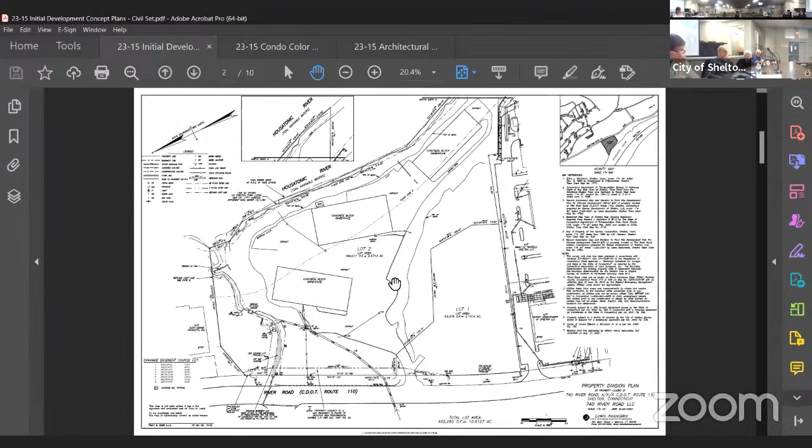Commissioner Amato had a question: what is that other property it's going to, where Fatty Patty is and Parker's? That's Parker's, where Dominic is pointing now, and the retail portion of the site. When we get to the second public hearing, I'll explain more about what's going on over there. Parker's is there, and Orthopedic Specialty Group is in the building back towards the rear, towards the river. So they're getting the almost 2 acres. That's correct, yeah. Okay, thank you.

So going to the site plan, we're proposing 51 townhouse style dwellings. Each dwelling has a 2-car garage. We are also providing a minimum of 18 feet out to the main driveway for the development, which provides 2 visitor spaces on the driveway apron. And we're also providing 20 additional visitor spaces in 3 separate areas on the site.

There's a confusing heavy dark line here through the middle of the driveway, that's a computer gremlin, you can just ignore that, that shouldn't be there. So we have a total of 224 spaces, or a total of 4.4 spaces per dwelling unit.

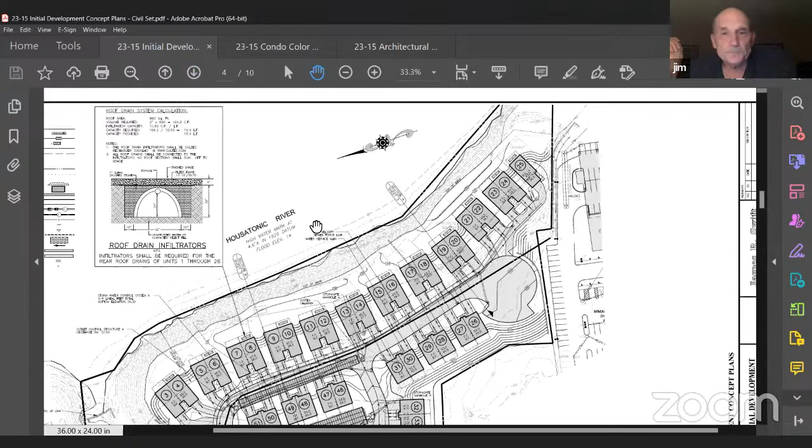So we have a site that has 2 pipe discharges into a water course on the northern section of the site. You can see it's a water course, but only where those 2 pipes discharge into it, and it's a rather steep valley which we're avoiding, staying away from that. Otherwise the site is pretty well graded, it's got a moderate slope from front to back, but nothing too much to handle. It's easily developed, so there's not much grading. The driveway has about a 10% grade coming into the site, but it flattens out almost immediately.

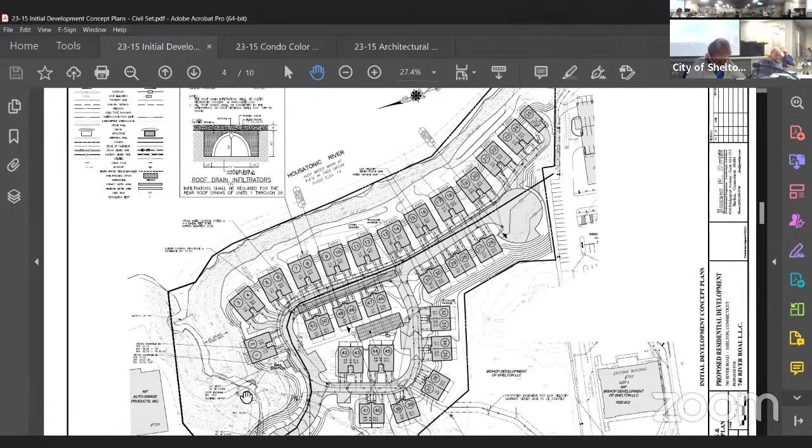Question: any concerns about the pipe on the left by units 1 and 2? I'll discuss that, it gets into part of the discharges. We have underground water retention and detention systems, a couple of those on the site. They're rather detailed in design because, as Dominic mentioned, we do have the inland wetlands approval already, and all those discharges fall to that pipe at units 1 and 2. That discharge is permitted in its current form by the Inland Wetlands Commission, and in point of fact that discharge will also have a drainage easement extending back up to PDD 72, which I'll get into when we start talking about that project and that hearing.

We are using a low pressure system because we're fairly low down by the river. Each individual unit has its own individual pump, and they all pump up to a low pressure system that extends out the southwest corner of the site over into PDD 22, going through the open property there. That low pressure system has been reviewed and approved by the Shelton WPCA. And again, for the record, all other utilities - water, electric, communications - are all available to the site as it exists right now.

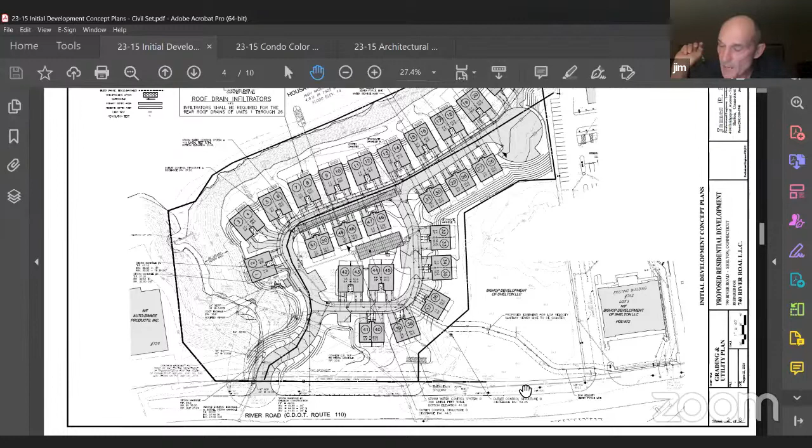If you go to the next drawing, Don. So this is an interesting drawing that was specifically requested by the Inland Wetlands Commission.

The existing warehouses were built fairly close to the river, and it's hard to know whether this embankment down to the river was a result of those buildings or was a natural form of the river eroding. But in any case, the question was raised: that's a fairly steep slope.

A 2-on-1 slope is more of a normal slope. Shouldn't we design these duplexes so we have long-term reliability that they won't be affected by the river? So that's what we did. We did these sections - you can see that the 2-on-1 slopes are projected into the area. We don't expect it to ever come to that, but it certainly is a possibility. So we did that for the Wetlands Commission.

I'll also address the FEMA elevations. The FEMA 100-year return storm is at elevation 14, which you can see is fairly low. And we're up at elevations 30, 32 for our basement. So there's no question of any effect from 100-year storm events, even 1,000-year major storm events. Nothing is going to reach up that high.

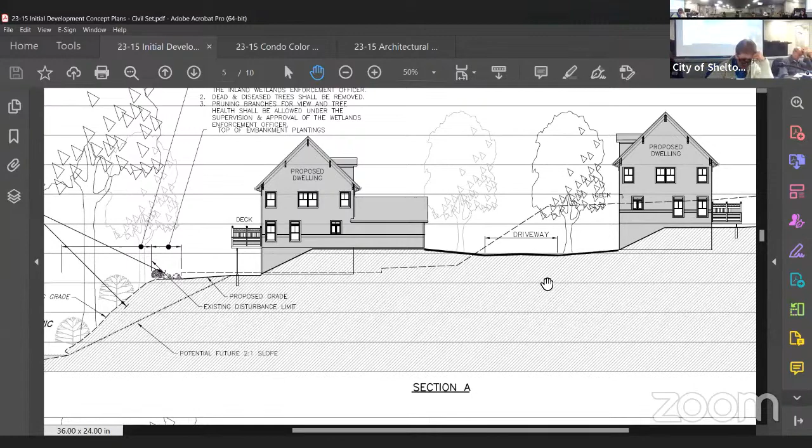So what's the difference on the right side? You have two buildings, two trees, and... There's two different elevations on this sheet. One section is taken through one portion of the site, and another section is taken through a different portion of the site. That's what I was asking.

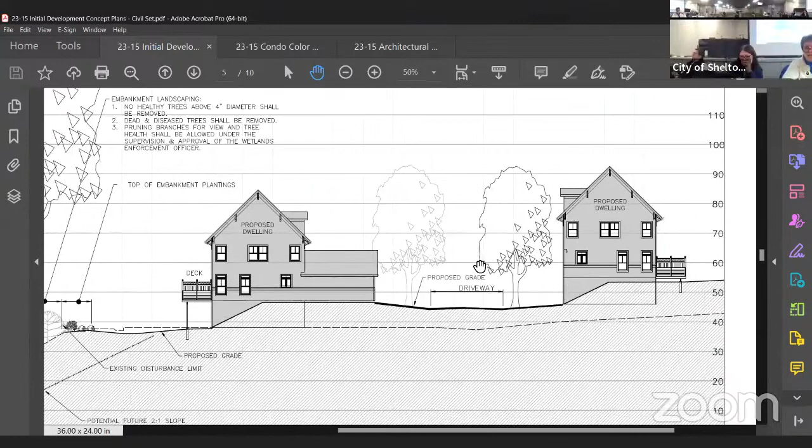These are in two different areas along the site, so you can see on the section - I'm sorry, I keep saying elevation - on this section you can see that the existing grade is well below a lot of the proposed construction. So what we're doing is we're balancing the site for cut and fills, where we don't have any intention of trucking any major earthwork volumes on or off of the site. So those two different dwellings you're looking at are the dwellings closest to the river. Then you see the driveway, and then the dwellings on the other side of the main driveway.

But I also want to make a couple of points on the section at the river itself, and I want to be very clear: we have no intention of grading out that potential future 2-on-1 slope. That is purely a precautionary indication.

Wetlands would like us to maintain all the vegetation on the existing embankment to the river, with the exception - and I've walked this embankment extensively with John Cook, we actually did it in the winter, walking on the river ice, which got pretty interesting.

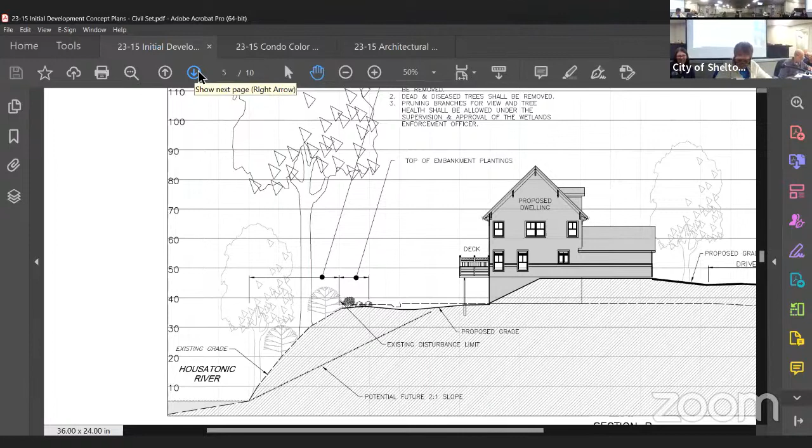I'm sorry? You're referencing a lot of information that's on sheet 5. Do you want to move forward to that sheet? Well, I just want to make one last point while you're looking at this particular sheet.

You're going to notice a little depression between that proposed landscaping and top of embankment plantings by the building. It's a low area, intentionally designed so we don't have any runoff, no fertilizers for lawns or anything like that discharging directly to the river. Now we can go to the next sheet.

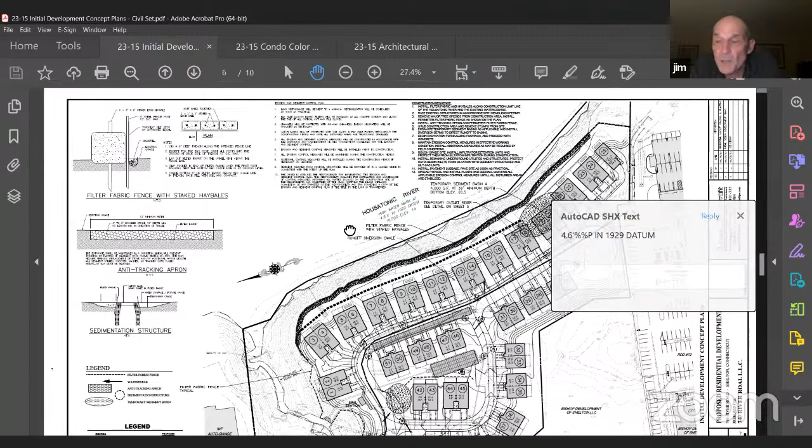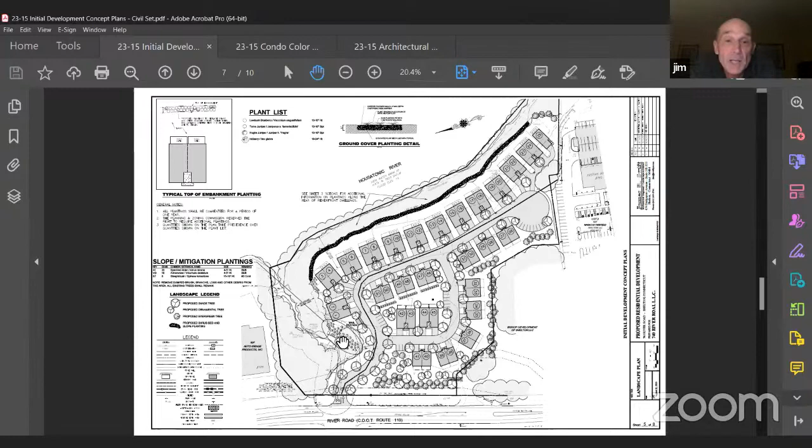We've got a little sloping, and some areas down there with kind of junk species, some dead trees, some logs, things like that. We're going to clean that up and make it presentable and more in line with what Inland Wetlands likes to see for wetlands and wildlife enhancement.

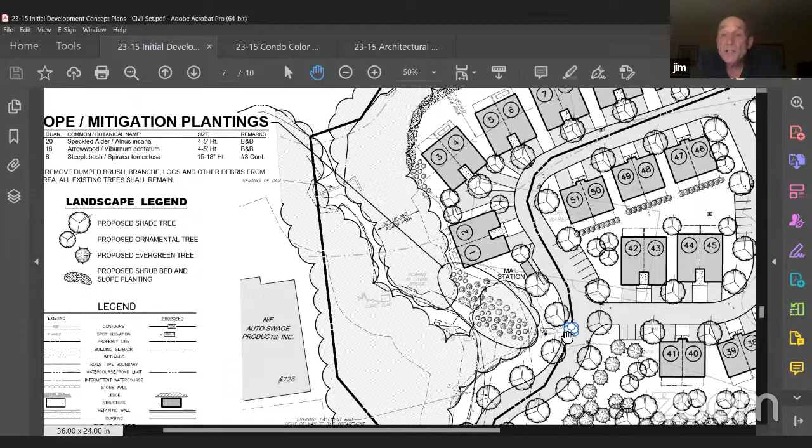The remainder of the landscape plan is conceptual, that's the kind of thing we'll be looking at in more detail. I'm sure Tony Panico will have comments about that, as far as how we buffer plantings, what standard planting details we'll have along all the units, et cetera.

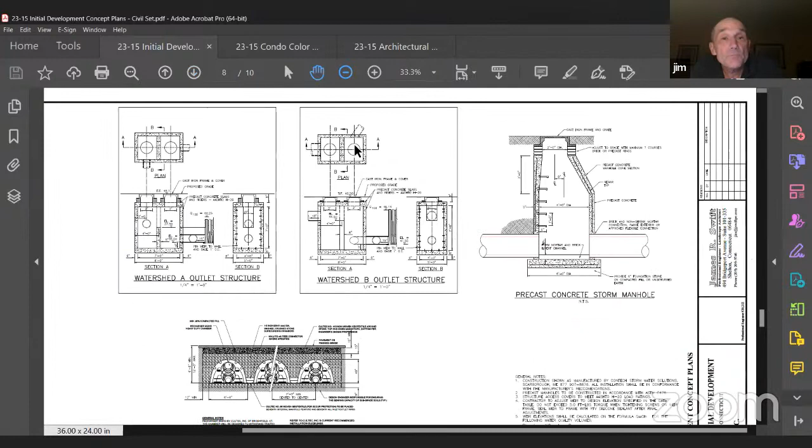Next plan. Again, this is a stormwater detail plan that has a lot more detail than this commission is used to seeing on an initial development plan. But it was done because it was required by the Inland Wetlands Commission, to be sure that all our discharges, all our runoff rates, all our water quality issues were all addressed.

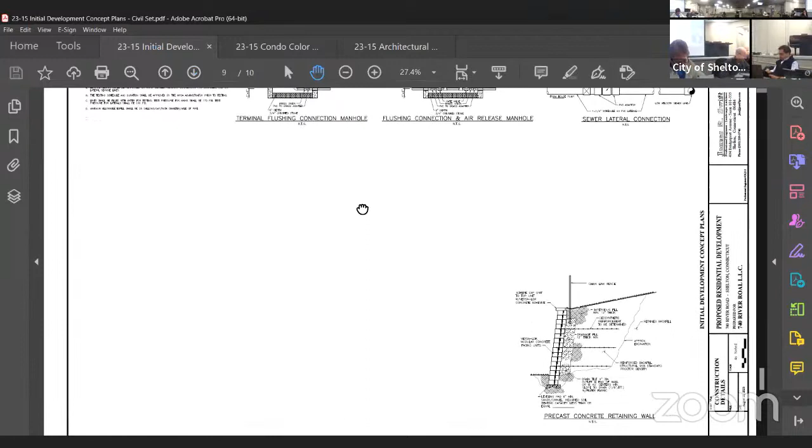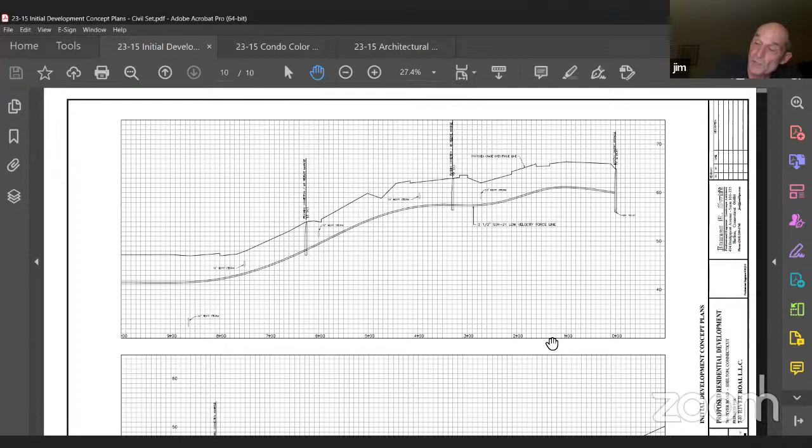So again, we have WPCA approval for this line. And that, without any questions, concludes the site presentation.

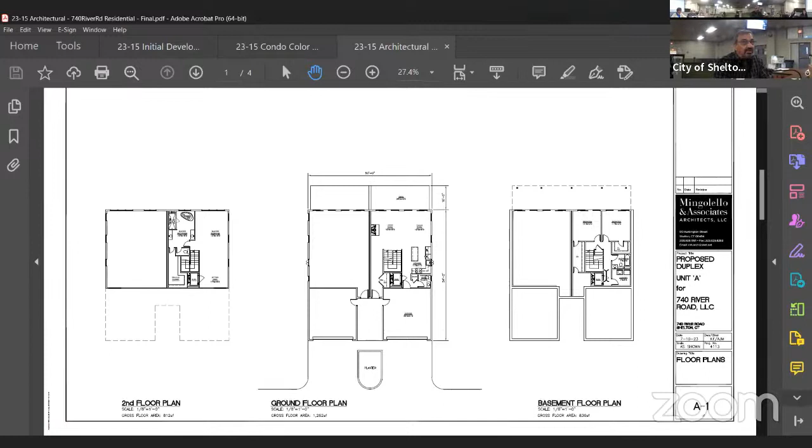And then the ground floor plan, the next level up, this is where we have the garage and the entrance. So this is right at grade, right at the street level. You walk in a little foyer and a coat closet there, and then we have a living room and dining area that is open to a deck and to lots of glass facing the water. And then from the garage, we've got a little half bath, coat closet, and a kitchen. Basically the whole first floor is open.

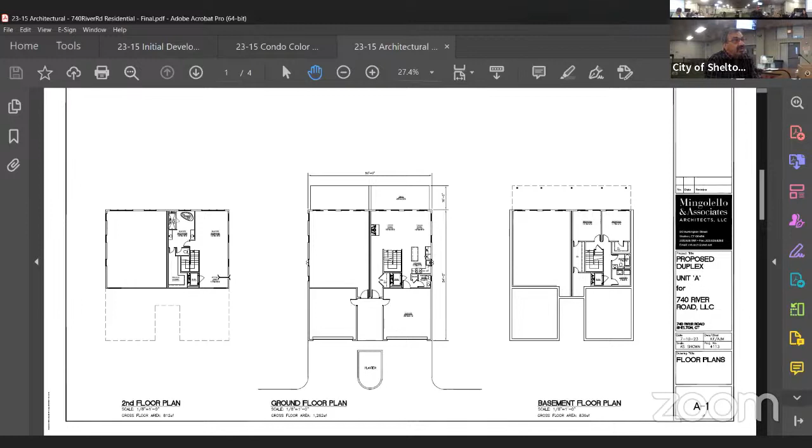And then you take the next level up, you can take the elevator or the stair, and it's a master bedroom suite, master bathtub, right on looking over the water, shower, toilet, walk-in closet.

Okay, so that's the floor plan. Can I ask you, on the basement floor plan, there's no walkout? On the basement? Oh yeah, there is, they're sliding glass doors, and you'll see them in the elevation.

On the right side, it's this big open room on the left. Pan over to the lowest level. There you go, see those 2 bedrooms? Those are on grade, and there's sliding glass doors facing the water. You walk out on grade from the bedrooms. Correct, yep. All right Dom, you want to go to the next sheet?

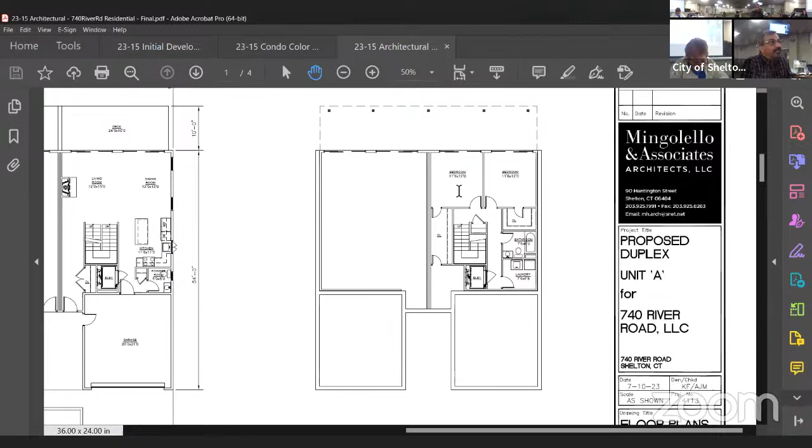We'll look at the elevations and the building section. Pan over to the right, front elevation, a little bit further over. Okay, so the front. That's good, thank you. That's the front of the building, what we call the street elevation.

You get the garage and recessed back of the entrance doors. It's basically vertical siding, and I'll show you a color. We colored up both units A and B, so you can look at the color and the treatment, roofing, and so on. Very traditional looking, dormers up into the attic area, vertical siding, thin stone veneer on the lower level.

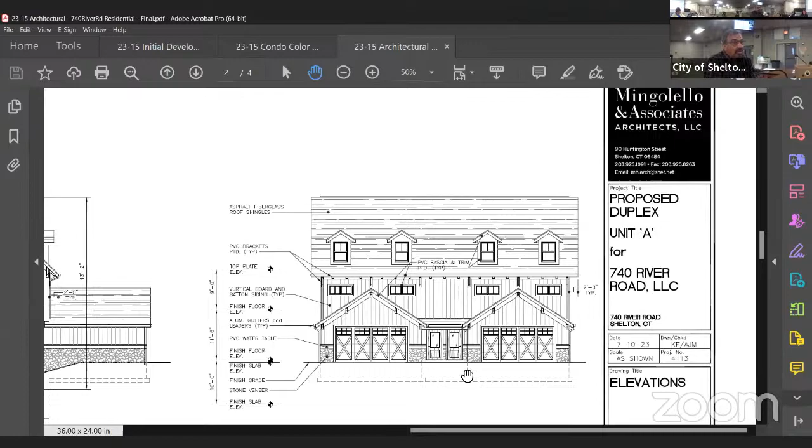I'm going to pan over to the right and look at this, the side elevation, left and right side elevation. As you can see, the grade slopes down towards the water, and you have the deck up above, and that's where those lower bedrooms exit at that grade. Okay, that's the side elevation.

And then the rear elevation, water elevation as we call it, those are your sliding glass doors from the lower level. Then we have the dining and living room up above, it's all glass. And then the master bedroom suite, lots of glass, and that's the bathroom. I'm sorry, forgot what space that is. But anyway, that's the rear elevation of the building.

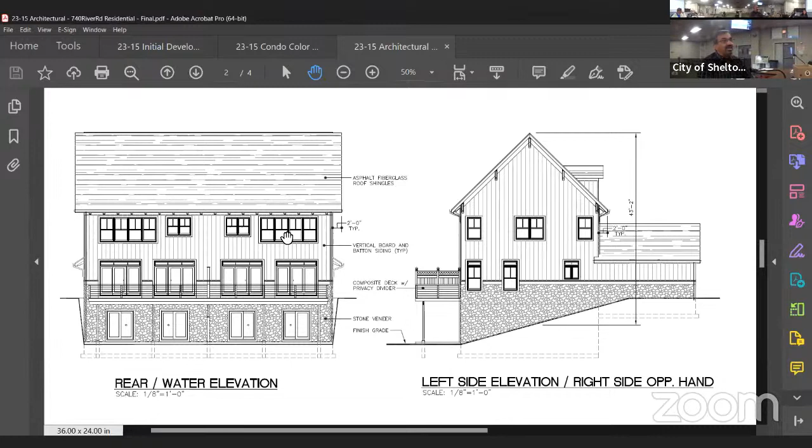Okay, if we can go to the next drawing, which are units B. Now, units B, as you saw units A are along the water. Units B are inland, and we work against the grade which slopes from the street towards the back of the building.

So the right side, we have the basement floor plan. You pull into the garage, and at that level there's an elevator and a stair to go to the main level and some basement space. If you're outside parking in front of the garage doors, you can walk up. There's a set of stairs, a little planter in the front, a set of stairs that go up about halfway to a little portico, a little entry porch, and that's where you'll enter.

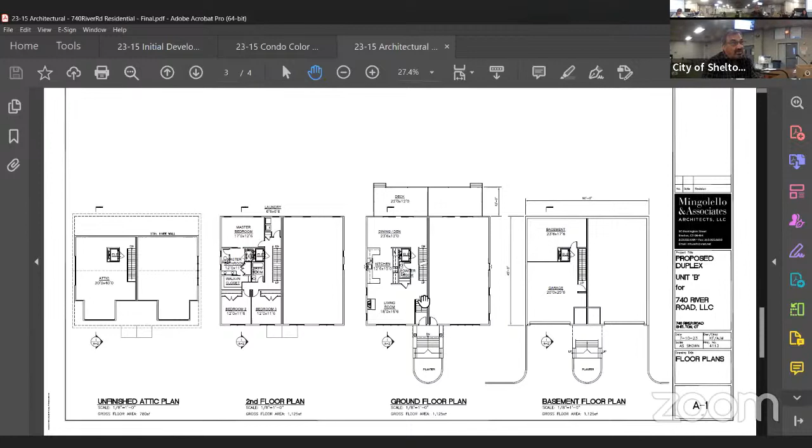So we go to the ground floor, the next plan to the left, and you can see you come up that portico, up a few steps. Then you walk into the house, and then you walk up another half a flight. So you're going 2 half flights to get up to the living space. So it's a living room right there on the left, and then the kitchen is between, a walk-through kitchen between the dining or den area and the deck. So that's the living space.

There's a powder room, and as you come up from the basement, you want to take the elevator, you get off at that stop, that level. And then the level above is the second floor. We have 3 bedrooms. As you come and get off the elevator, you take the stair up, you got the master suite. The master bedroom's on the back side, master bathroom, walk-in closet, shower, closets, and then the elevator's there, a bathroom, another bathroom in that space that will service bedroom number 2 and 3.

And then the level above that is the attic. You can use that as an office or a guest suite, whatever we wanted to use it for. There's a dormer out front, you'll see that in the elevations. And windows on the back, so it's well lit, lots of glass. And a little knee wall on the back side.

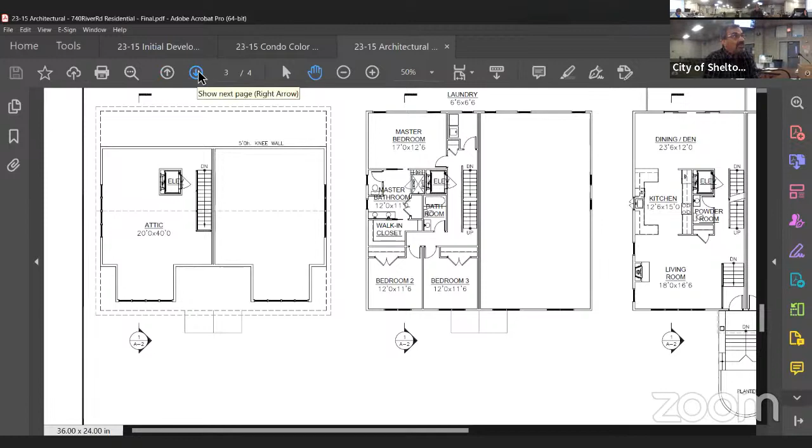Dom, can you go to the next sheet, which is the elevations and building section? So this is the building section. As you can see, we're working, you come in at the garage level, then you get a basement, and the level above we're working into the grade, and you see it on the elevations. The living space, kitchen, den, bedrooms on the next level, and then some attic space above that could be used as an office.

We go to the front elevation, right side. There you go. Okay, so this is the street elevation. Garage under, portico coming up halfway.

The big windows is the living room. Two windows above for the two smaller bedrooms, and then that shed dormer up on top is in the attic space.

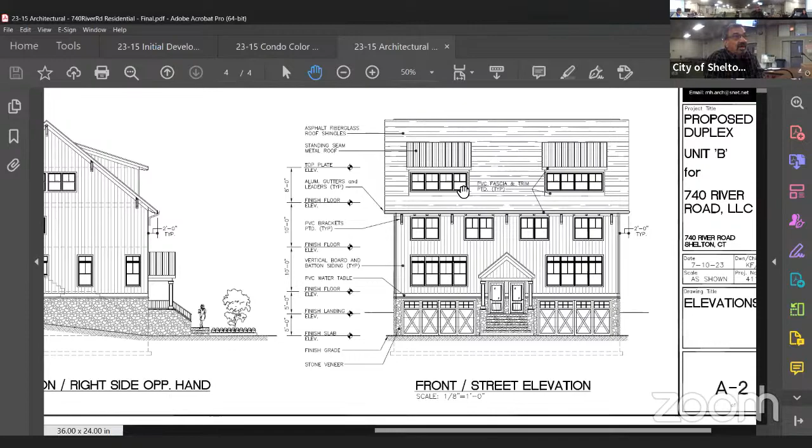It's the same siding materials we're thinking on both the interior and exterior buildings, vertical siding and board and batten style. We're thinking black frame windows and thin stone veneer for a base, which we'll see on the colored elevations.

This left side elevation, right side are opposite. You can see as the grade slopes from the street, it slopes down towards the back where the deck is. It's probably 4 feet above grade in the back as we work the buildings into the grade.

So that's the side elevation, and then the rear elevation to the left is the sliding glass doors. There's 12 feet of glass there for the dining space. That's the dining room and a little den in the corner, and then the bedrooms above, with the master bedroom above that.

Do you have a divider here between the left and right side on the patio, on the deck? Oh yeah, absolutely, for privacy. That'll definitely happen. You can see it here on the rear elevation.

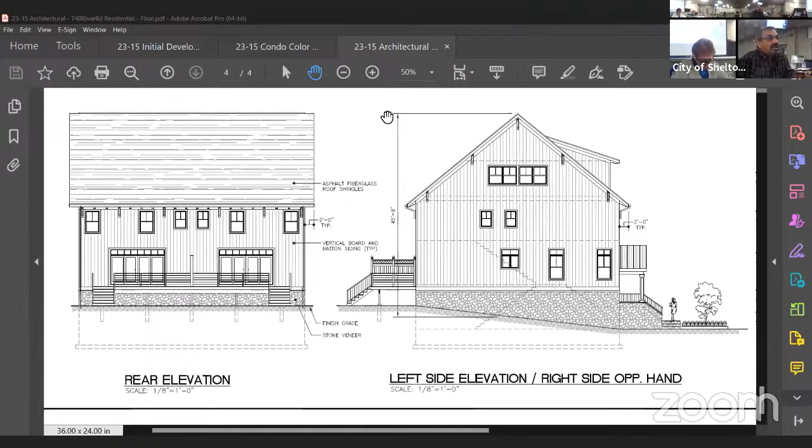Don, can you bring up the colored elevation? These are the two colored elevations we did, a little magic marker rendering. This is the front, unit A.

Unit A here is the one adjacent to the water, with the garage and thin stone veneer down below, vertical board and batten siding. We really like the look of black frame windows with board and batten -- it's really nice, a great color and use combination for this development. So that's unit A, facing and adjacent to the water.

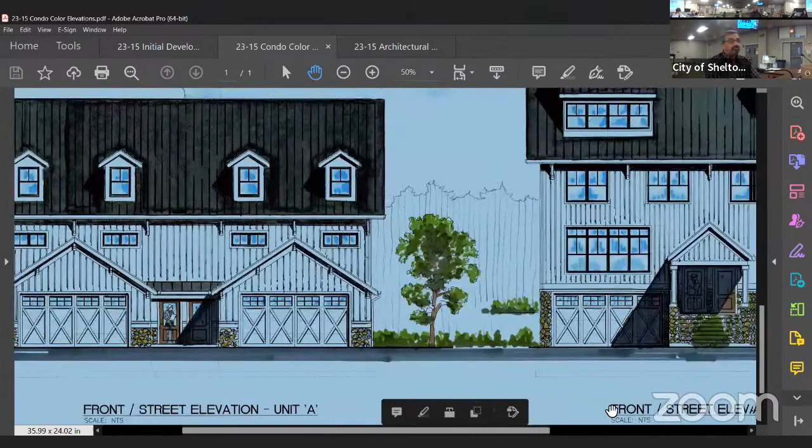And the one to the right is unit B -- same thing, same use, same materials. This is basically the 3-story unit B, constructed into the hill or into the grade, as the grade slopes up away from us.

Any questions about the materials, the colors, the architecture? For units B, are those the ones in the inner circle? Yes, that's correct. So you have 25 that are on the water, and the balance, the rest of them, go inside as unit Bs -- that's correct.

Any questions from any of the commissioners for Mr. Mingalello? My first reaction looking at it, they look like barns, to be honest with you. It could be because of the doors, right? Well, I think it's the doors, but also the height of the roof. Well, it is a pitch -- so at first I thought, are these gambrel roofs? No, in the drawing, I get that.

And this portion on A2 here is just this little section, correct? Is that an alternative garage door you might consider? No, absolutely, we would like to add some glass to the doors, but we can get something different. There's a lot of options out there. Those doors kind of turn me off too.

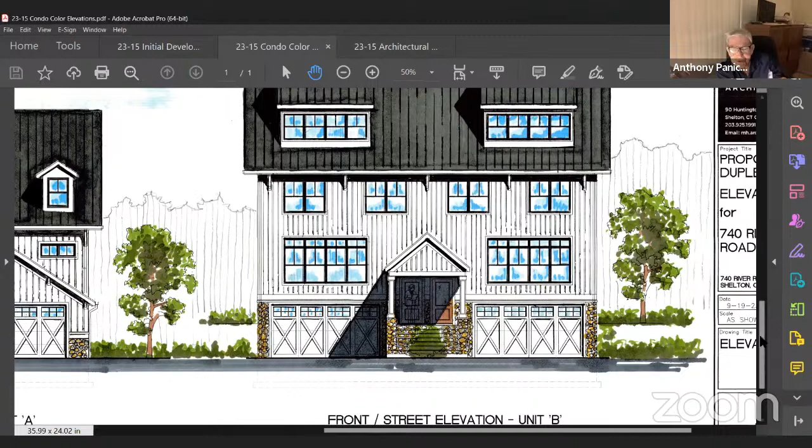Joe, as you were explaining unit B, I noticed on the main floor, after you go in the front and up half a step to the living area, I didn't see any closets for hanging your coats. Oh, I'm not an architect, I just happened to notice it.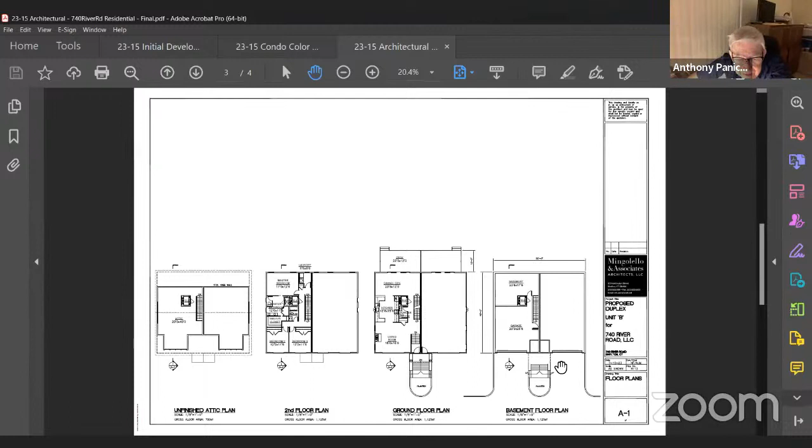Now, if you look at the ground floor plan -- if you're a guest, you come in the front door, which is the next level up, ground floor. You come up half a flight, then up another half flight of stairs, and there's a double door closet right there, in front of the powder room. I see it now, I didn't see that before.

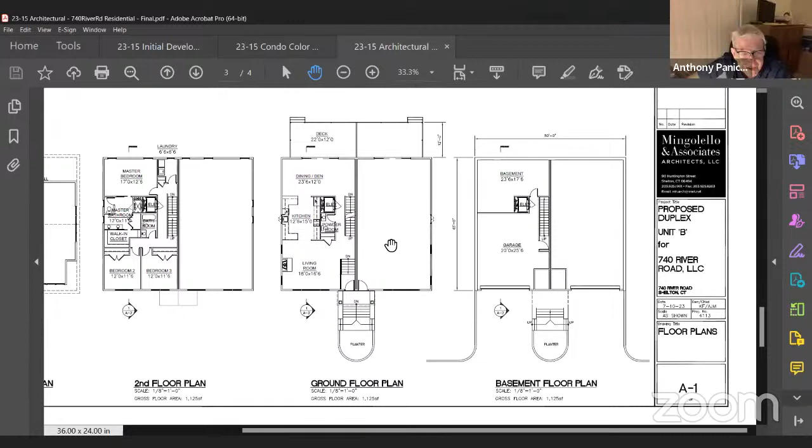Adjacent to the powder room. Yeah, that's what I'm saying. I didn't see that before, I just looked right past it, I guess.

That's okay, they're tiny. So we had a couple questions over here about the elevators -- are they going to be in all the units, or is that an option?

They're all in that's units, correct. And Frank wanted to know if they're big enough for a wheelchair. Yes, a wheelchair. So if somebody wanted to buy one of these and put a wheelchair in there, you would accommodate that? We have to do it by ADA law. So that would accommodate, as well as the bathrooms.

When I was in high school, I worked for an old lady who had an elevator in her house and it was run with a rope. I had to take her up with the rope. It's like a dumbwaiter kind of thing. Creeped me out, I gotta tell you.

When you get in multi-story buildings like this, you really need an elevator because that's what gives them great appeal, like those condos across from where Starbucks is now. They've got elevators. We did Aspen Ridge in 2000, and John Paul's one, they were fantastic. That was a big deal. Same concept of building into the hill. You got 3 stories, 4 stories. It's very important.

Okay, any other questions, comments, or considerations from any of the commissioners? Not specifically for Joe, but just curious, probably Attorney Thomas will address it, but what makes this eligible for a PDD? It exceeds the 20,000 square feet that is the requirement on River Road, and it's in the IA2 zone. It's not surrounded by residential.

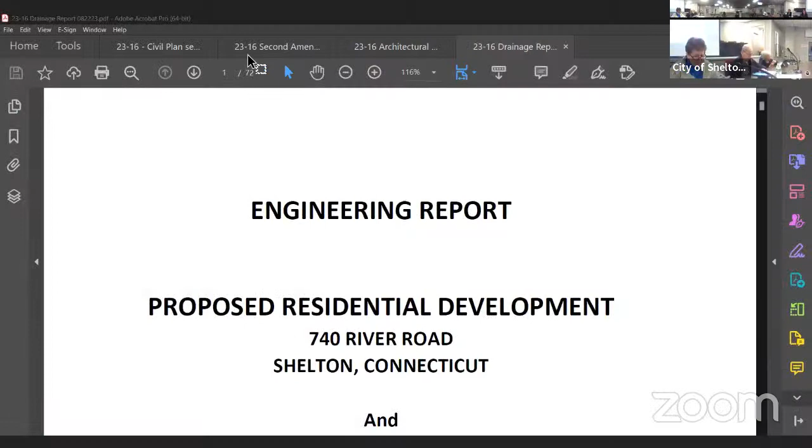So with that, I would call upon Mr. Swift, and I will bring up the site plans. Okay, question while you're doing that, Attorney Thomas.

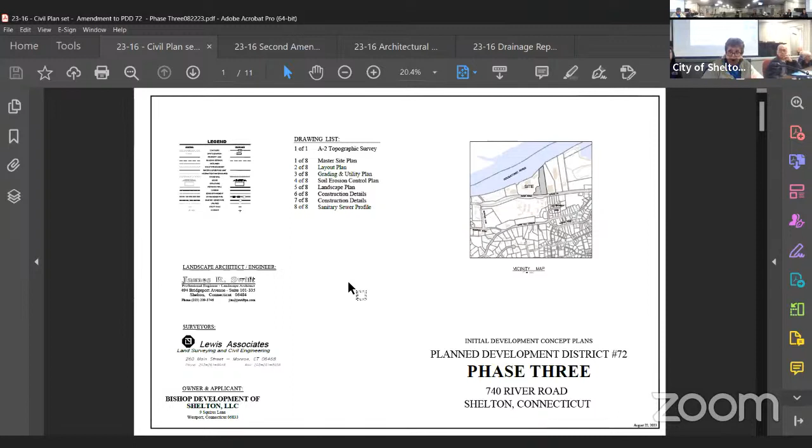On the one-page application, number 7 says area of zone change is 93,000 square feet, an area of 2.1414 acres. Is the 1.83 acres that is to be transferred part of that 2.1414 measurement?

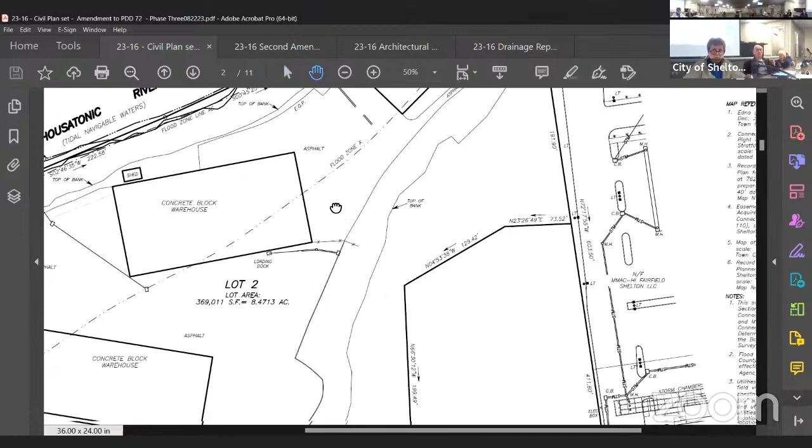I believe lot 1 is 2.14 acres. Let me blow that up for you. That's what they said before. Right, that becomes part of it. This is the 2.1414 acres that I am referring to.

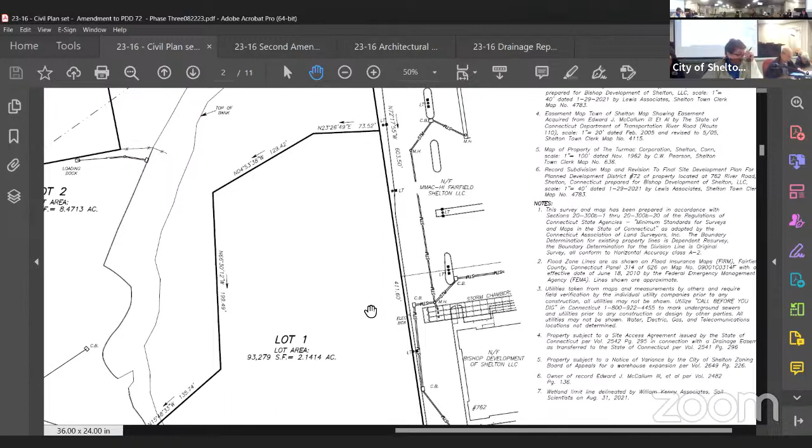And that's going to become part of the PDD to the right where the restaurant is and the medical building in the back. So is that already calculated in that 2.14? That is part of that property where the restaurant and the medical building in the back are located.

Just a minute, let me bring up the amended statement of uses and standards. I believe I have those numbers. The purpose of the amendment is to increase the size to 6.09 acres by adding, I think I may have a typo there, 92,000 square feet to the existing area, so the total size is going to be 6.09 acres.

What's the other one, of PDD 72? So what is the proposed PDD going to be, minus that 2.1? The proposed PDD is going to be 762 River Road plus the 2.1414 acres. And of that 2.1414 acres, is the 1.83 already in that calculation?

This is Jim Swift. I think I might be mistaken when I used the 1.83 previously. We're going to have to clarify that. Okay, go ahead then, and at a future meeting just clarify that for us.

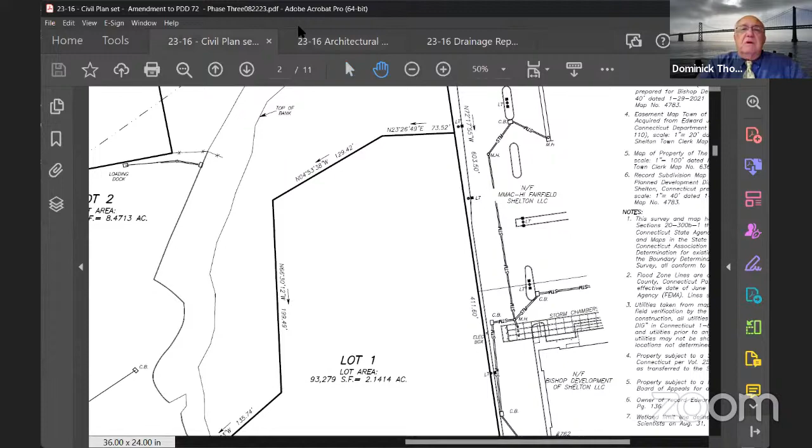In the civil plan set, Jim, just let me know what you want to review. Go to the master plan and the site plans. Jim Swift, professional engineer, landscape architect. I think we have to make sure our figures are correct and that the areas I gave are correct, so we'll confirm those with the commission.

Looking at the master plan, for clarity I've broken this down into 3 phases. The first phase we constructed was the retail building at the front of the site. After some time lag, we built the offices for the orthopedic specialty group in the rear, which I'm calling phase 2. And I'm referring to this new application for expansion of PDD 72 as phase 3, just semantics to clarify things a little bit.

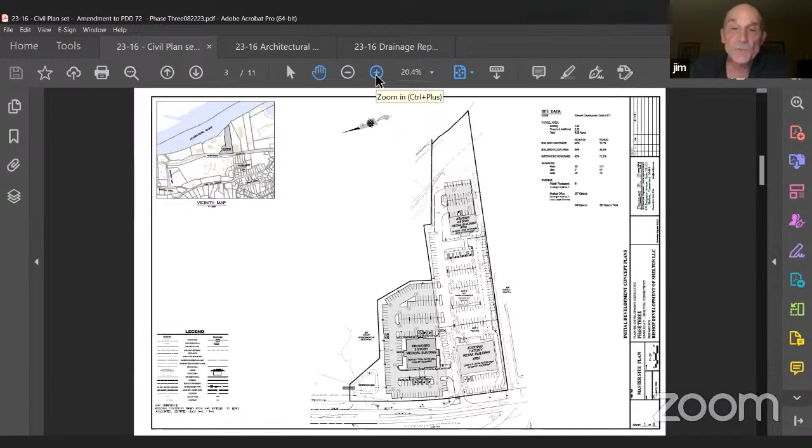For phase 3, what we're proposing is a 3-story medical office building. We're proposing to add 76 parking spaces for a total parking count of 363, which is about 15 spaces more than required, and that's enumerated in the site data for parking.

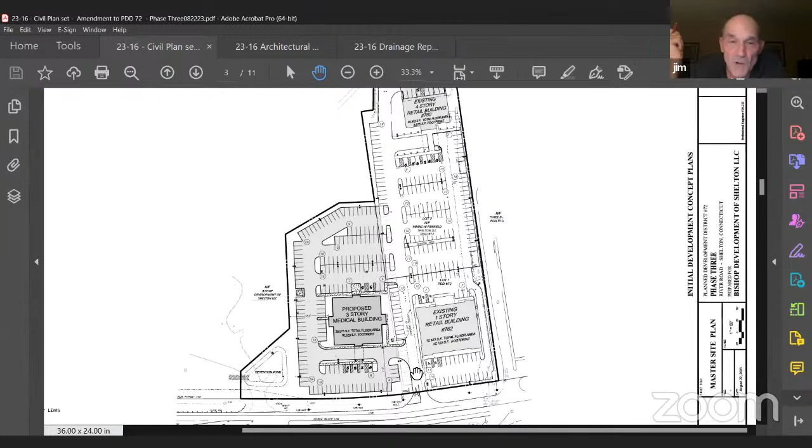And again, this is all shared parking. As you can see, all the parking lots are connected. As I indicated before, we're using the existing driveway entrance that's there now, providing access to the front of the medical building, and also connecting all the rear parking areas in the back of the proposed medical office building.

And if you could go to the next plan, Dom, for this enlarged site plan. So this just shows a little bit more detail as to how we're providing entrances into the building, both in the back and the front, showing more handicap parking spaces than are required by code just because of the use of this particular building.

I do show some of the major appurtenances that are necessary, such as the transformer, and the trash area located, the masonry enclosed trash area towards the back of the building. These are things that normally we can figure out later on, but I like to show them up front whenever we can. And you'll notice to the left of the property, we have a little bit of room to do something that we normally don't have room to do, which is a surface stormwater detention pond.

So going to the next plan, which is the grading and utility plan, you can see that we have all the stormwater requirements for phases 1 and 2 installed. They discharge towards the back of the site. They do not affect the drainage for the phase 3 development in any way.

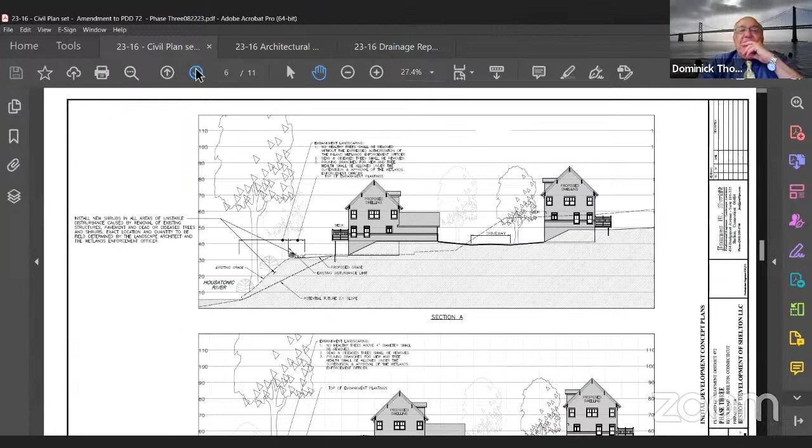So the next plan is some of the boilerplate for initial development plans. This plan was inserted in this set by accident, it has nothing to do with it - another computer gremlin. But the soil erosion control plan is very straightforward. All the drainage is easily directed out to the front surface detention pond. That's where all of our erosion control would take place, and you'll see a more detailed plan for that in the detailed development plans.

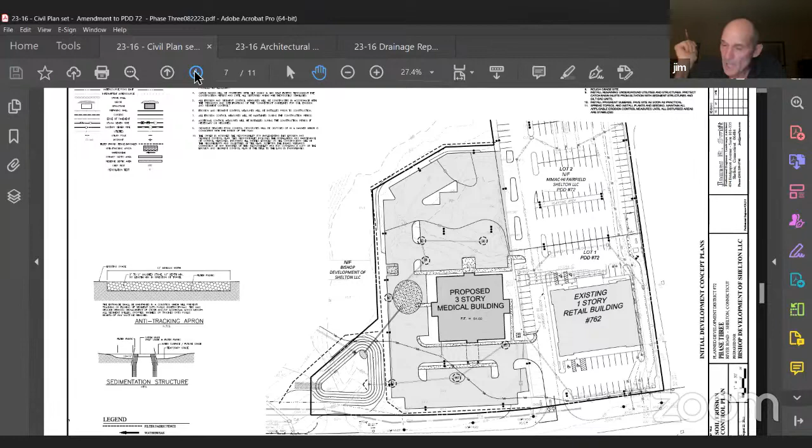The next plan is the landscape plan. Again, it's conceptual in nature, shows how we're going to install the major shade trees, some of the buffering plantings, things of that nature. It's very general because in this case there's nothing really in particular that needs to be addressed for initial development plans, and you'll see a lot more detail in the detailed development plans.

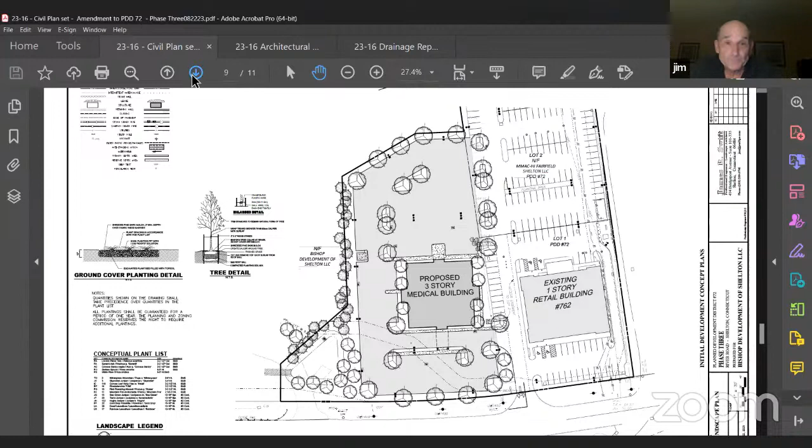The next plan is again one you don't normally see in initial development plans. But these are the details for the stormwater system, the details of the outlet structure, the sedimentation basin, things of that nature. Those needed to be done for the Inland Wetland Commission for them to adequately review the plan.

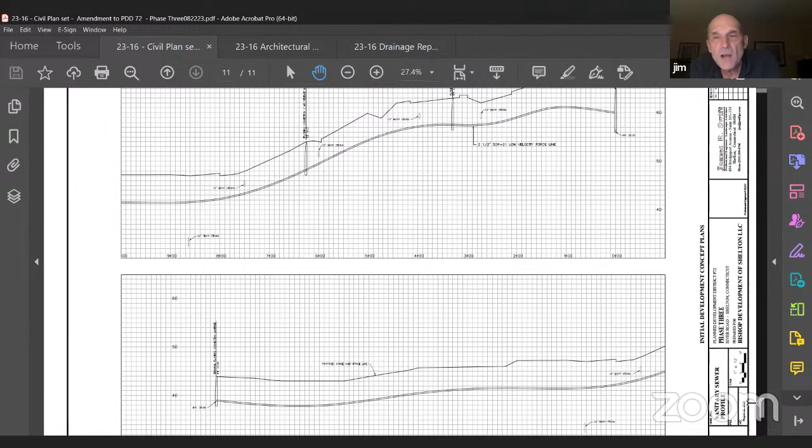And then the last plan that we have in this set is again the sanitary sewer low velocity line, which the WPCA and the city engineer like to see, just to make sure that things are all copacetic with how all that lays out. So in this respect, the addition for PDD 72, the additional building and property, is fairly straightforward. There's nothing particularly complicated about it, either in an engineering perspective, in a traffic perspective, or anything of that nature. And if the commission has any questions, I'd be glad to answer.

Mr. Swift asked, on sheet 8 shows a black vinyl chain link fence, where exactly is it proposed that be installed? That's going to be around the detention pond.

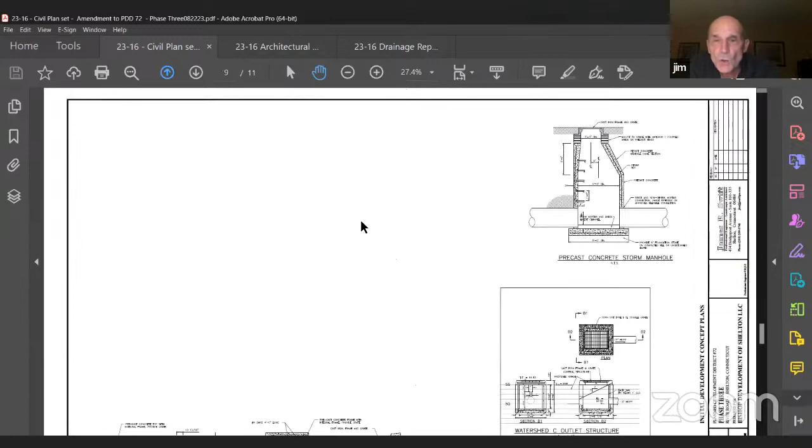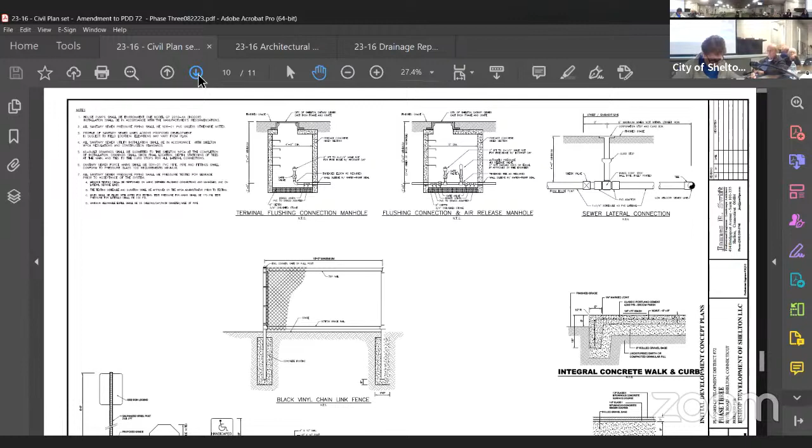That's fairly common, and I like to put that fence detail on because we're likely to have retaining walls between the properties, and that black vinyl fence needs to go on top of those retaining walls. The wood guide rail shown below it on sheet 8 is for the same criteria, when we have a slope separating us from an adjacent property. Before you get to the retaining wall and black vinyl fence, you'll have that wood guide rail to protect both of those appurtenances.

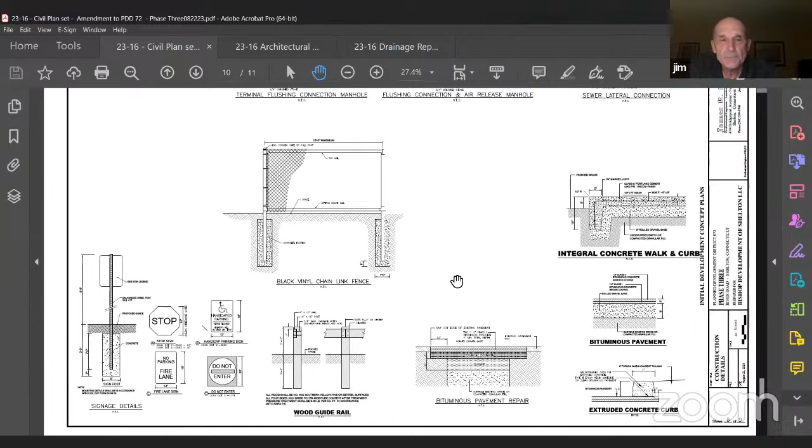I understand the philosophy, but where in the plan do you have it? Let's go to the grading plan, I think I can show those there. It doesn't show it on that one.

When you go back to the back of the property, when I put both of these plans together, you're going to see there's a pretty good slope going down into the condominium site. That's where the wood guide rail would go, and also up by the detention pond. I did have some slopes toward the rear, phase 2, the orthopedic site. I think I have a retaining wall on the condominium site that's going to require a guide rail on top of our PDD number 72.

Yeah, back in there somewhere, so I think I need to at least show that. What I did when I tried to separate these two plans was make sure they could stand on their own, and in doing that I tried not to overcomplicate one site being confused with another. But in this particular case, I may have taken that precept a little too far. I should show on PDD 72 some of the proposed work on the condominium site and the things we need to do on PDD 72 to accommodate that. I will add that to these drawings.

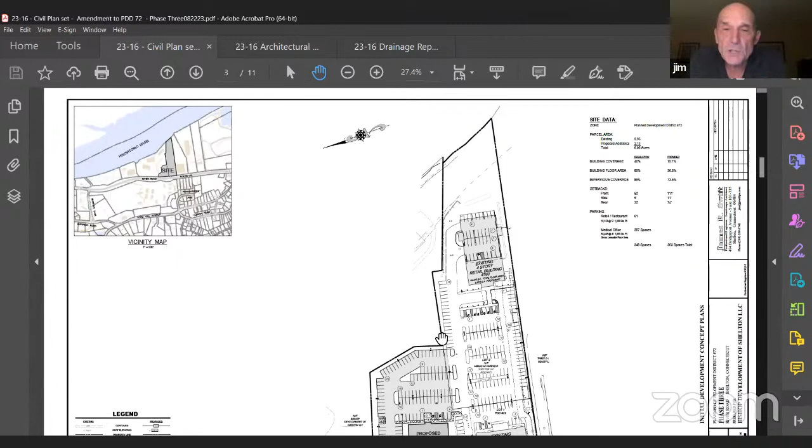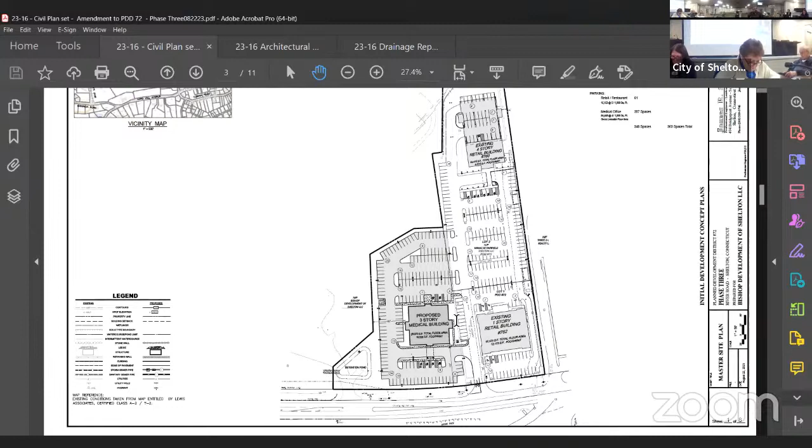There are 10 spaces when you pull into the driveway that are between the proposed medical building and the existing one. Do you have enough of a drive lane there? Are you proposing to remove those 10 spaces, and what about the parking spaces right past it as you go to the rear of the lot?

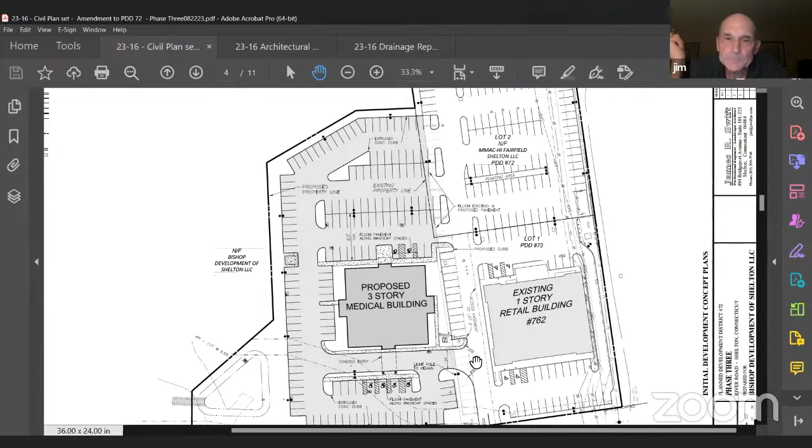Yeah, we have enough space in there. I believe we use 26 feet, and I'll have to confirm that when I get a sheet plan in front of me that I can actually scale. But between those 10 spaces and the curb at the existing retail building, there's more than enough space to maintain two-way traffic. Again, if we need to increase that driveway width, we'll just have to push those 10 spaces a little closer to the medical building.

Well, the concern is if somebody pulls in, when they go to leave they have to back up, backing into the driveway. Are you talking about these spaces here? Yeah, those spaces toward the front, immediately at the front of the driveway. Oh yeah, absolutely, those spaces are certainly up for discussion. I'd like to hear Tony's opinion on those and we'll go from there.

Mr. Smith, are we going to see a drawing of the building, or is that coming? Yeah, that's coming.

Jim, is your intention to totally fence this off so there's no way folks in the condos could walk to these buildings? Unless they walk on it. I think if we wanted to create a pedestrian connection between the two projects, it's doable, if that was the question. We're not talking about 'get a burger, go to Parker's' exactly, but yeah, I think that's doable.

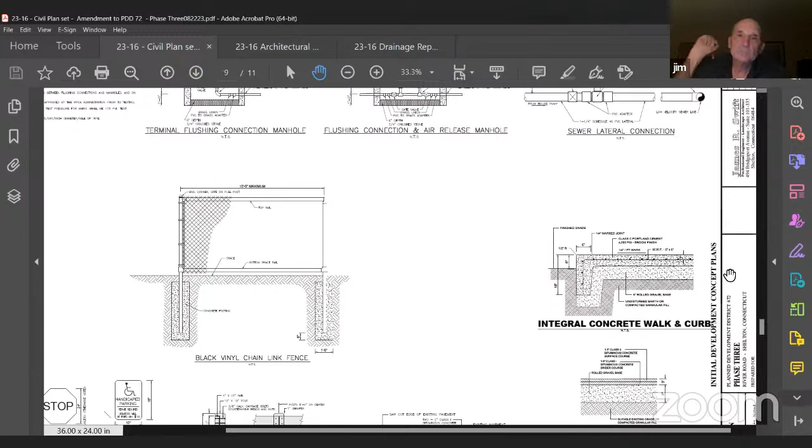Well, the vegetation within the pond itself is very specific. If you go to the detail plan... Dom, just page down a few. Yeah, pass that drawing, keep going. Yeah, in the bottom of the previous sheet. Sheet 7? Just go down a little bit more. Yeah, there it is. Our detention basins that I design, I've got sort of a formula that's been worked out with inland wetlands over the years.

The 5 feet of the side slopes and the bottoms get certain plantings of grass species, rice cut grass and hop sedge that forms the perimeter of the water. The water itself at the bottom of the basin, I don't have to plant that. The cattails are going to come in, guaranteed. They do every single time. And if the commission cares to drive by any detention basin I've done in the last 35 years, they're full of cattails, and that's exactly what they should be.

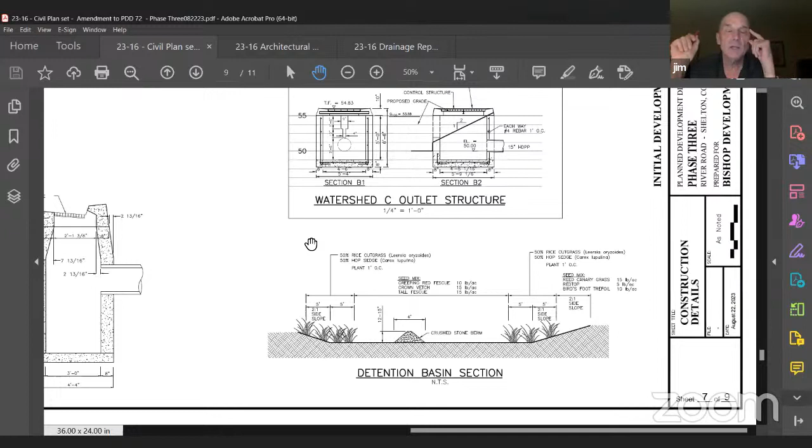Now, once you get up over the higher part of the slope, in my preliminary landscape plans, I like to show evergreens around them. Sometimes if the embankments are tall enough, I'll reference John Paul's subdivision on Booth Hill Road that had, the commission remembers, a very steep slope. It's probably 30 feet high down to that detention pond.

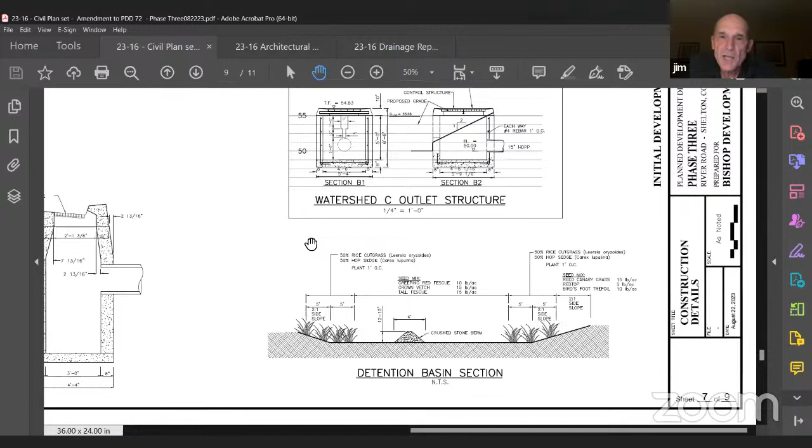And what we did there is rather than planting trees far apart on center, we actually planted red maple whips, something as thick as your finger, every 3 or 4 feet. And everybody knows how red maples grow. Those are going to fill in that embankment and stabilize it within 3 or 4 years. I don't think that's appropriate in this particular situation because I don't think these embankments are that tall. But we certainly look at things like that when we get into the detailed plans.

I appreciate that. And just know that I have detention ponds on either side of my property and they're all loaded with invasive species. Not just what's put in there initially, it's maintenance. They get really rangy, really a mess. Yeah, Phragmites and barberry are the greatest dangers.

I'm not aware of any, certainly there's Phragmites along the river. I didn't see any along our frontage. I think the biggest colony of it is probably over by the dump, but I'm not sure. But we look for that kind of stuff invading in here. I don't think it's a danger immediately here.

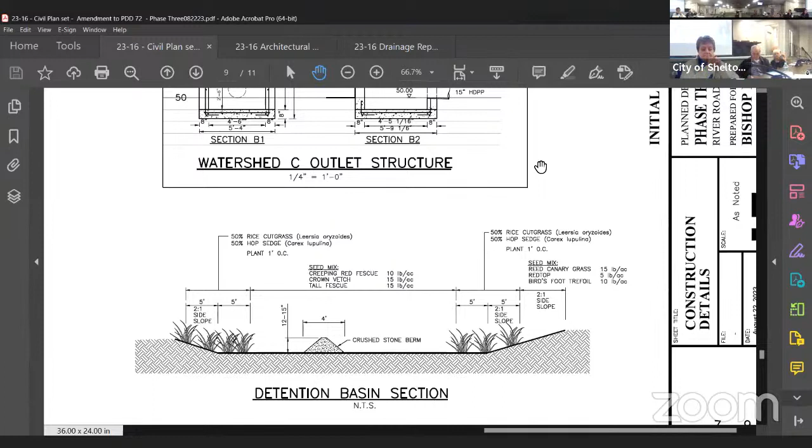It's not a long-term maintenance plan, it's going to be a mess. I don't care what you put in there initially. Exactly, so just saying, well, it's going to look like a wetland. No question about that. Like the mugwort and Japanese knotweed and multiflora rose. Unkempt, unsightly.

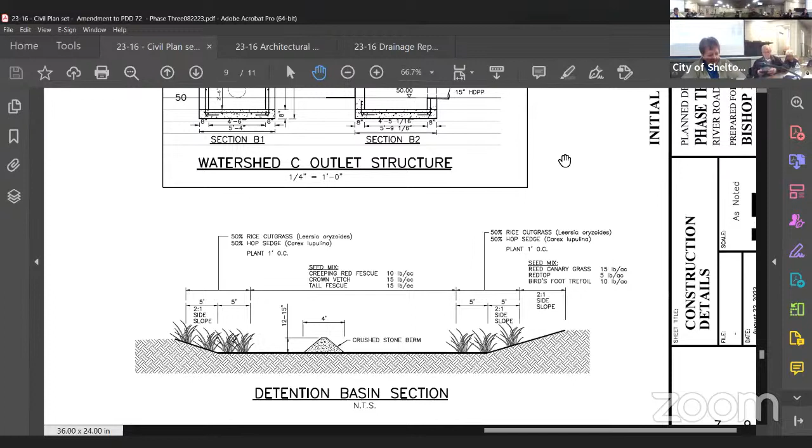Good evening. Joe Mingalello and Associate Architects, 90 Huntington Street, Shelton. Let's just start with the floor plan.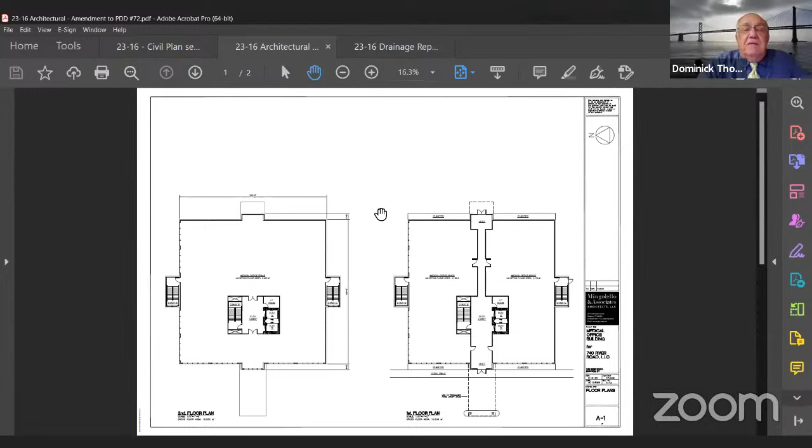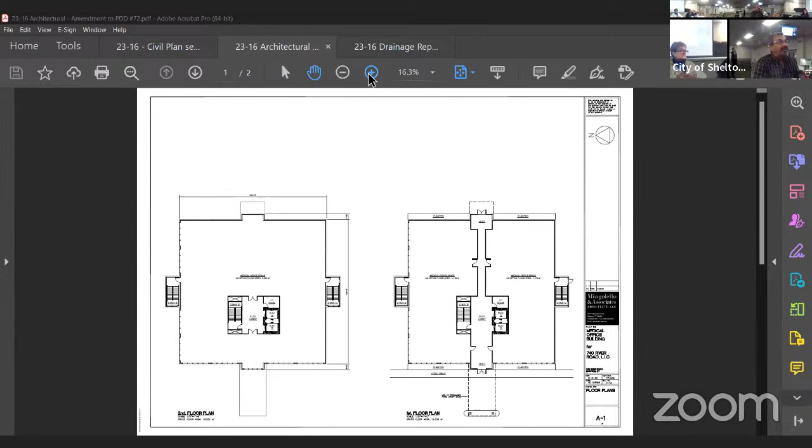It's disappeared. Can't you see my screen? No, no, something's off. That one is off, that one's on. Yeah, these two. You're on too. You're off too. Drop signal. Yeah, absolutely. Wait, if it's coming back on. Maybe not. Hold on, we have a little technical difficulty here. Mine says Safari can't open the program. All right, mine says it's connecting. Oh, here it is. It's back. We're coming back. We're almost there. Here we are.

Okay, go ahead, Mr. Mingolello. First floor, can you pan down a little bit? There you go. First floor plan, you saw where the building was located. We created a little portico here. It's a medical use, so people with any kind of disability can get out when it's raining and miserable and get into the building. We have a center core, 2 elevators there, and access out the back. So we have basically a walkthrough, no matter where you're parking. It's relatively convenient to get into the building. This is a footprint of about 10,000 and change at this level. And then the second floor right next to it to the left, same core goes up, 2 exit stairs on each side, fire stairs. And then next level down.

The second floor was the elevations, same size, about 10,000 and change. Okay, I'm going to pan up a little bit.

This floor, the third floor, is about 8,000 and change. So the total is 29,750, I believe, almost 30,000 square feet.

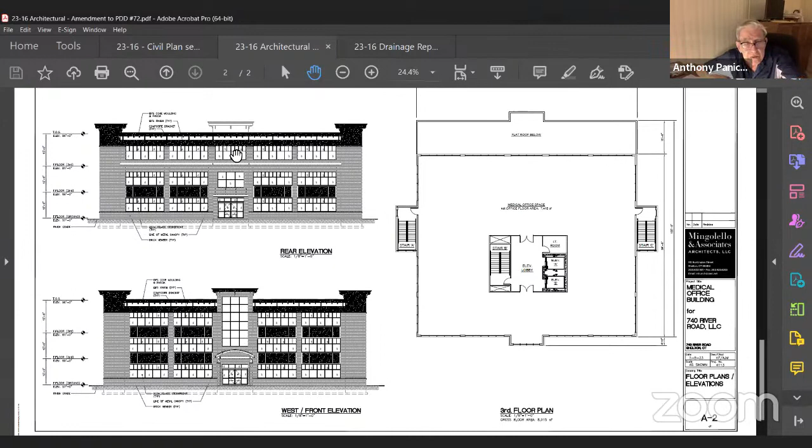Mr. Panico, are you referring to the front elevation over the entrance door? I'm looking at the drawing in front of us. I don't know why that feature over the entry can't be the same in the back — it doesn't expand any floor space. Go to the side elevation. I think this is what Tony is talking about — this area here, why can't it be like this, is what he's saying. That's all I'm talking about.

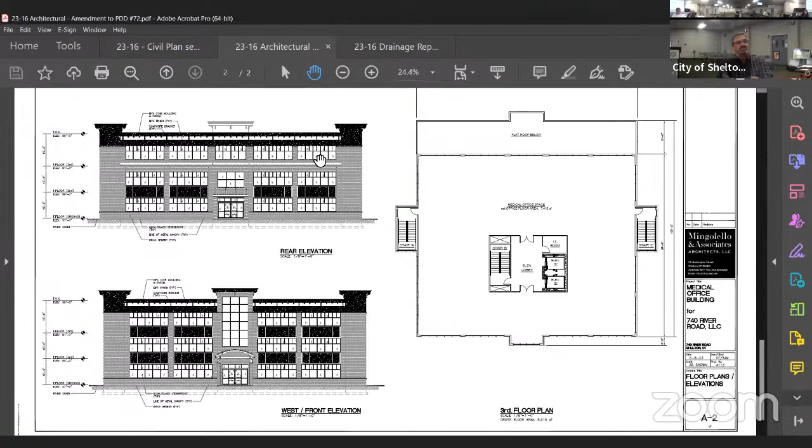Yeah, if you go to the side elevation, you'll see why — there you go, that's why. You can't have the glass going all the way up. Okay, I'm sorry, I didn't realize that, you're right.

How about the flat roof? It steps that way because of parking — we couldn't accommodate more square footage without reducing the parking. Oh, that's the reason, all right.

I thought Jim said we had a few extra spaces, we would have been happy to do that, would have been great. Yeah, but it's a parking thing, so we're trying to work with it. I thought Jim said we had a few extra spaces. Yeah, he did — again, there's no evidence at all on this site of any parking issues whatsoever.

Certainly, this is a PDD. If the commission feels that the parking count we adopted from the PDD is too high and there's too much blacktop for the space, we'd be glad to add the square footage to the building and keep the parking the same, and reduce architecturally. That would make sense — the last thing we wanted to do was step it like that.

Well, I will tell you, looking back at my question about making a link for people to walk, this is going to be prime parking for people having parties who don't have visitor parking at the condo. True, but I don't mind this configuration.

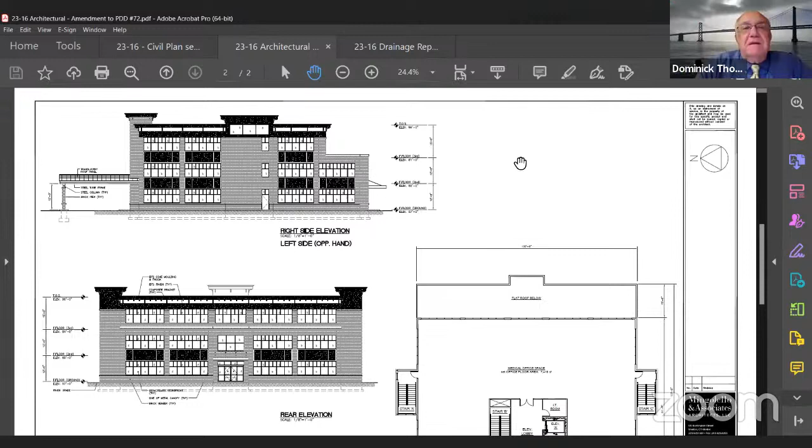Okay, any further comments, questions, or concerns from the commission or from Mr. Panico? I have a couple of questions for Jim on the site plan, if I may. Go right ahead, Mr. Panico. Could we put the site plan up? Sure.

You want the full site plan? Yes, primarily the street portion of it. Oh, okay, hold on.

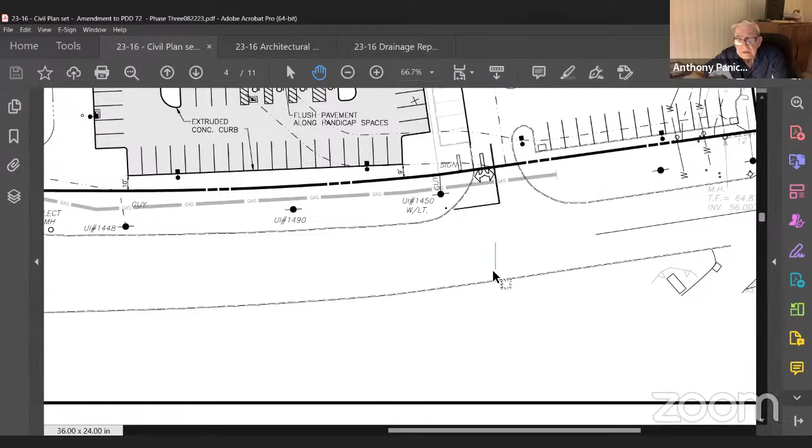Yeah, so, yeah, we can't. Good point, that's it. If we can drop it just a little bit. Yeah, I am trying to. That's good, that's good.

When I look at this and come to the conclusion, we're talking about a total combined development of 96,500 square feet, more or less, and 363 parking spaces, serviced by one single driveway. That disturbs me. I think there's no reason we can't redesign that entry driveway and increase the exit side so there are 2 lanes exiting, separated by a median, with the ability to devote each lane to an exclusive left and right turn. I think the whole operation will function much better, and there's room to do it.

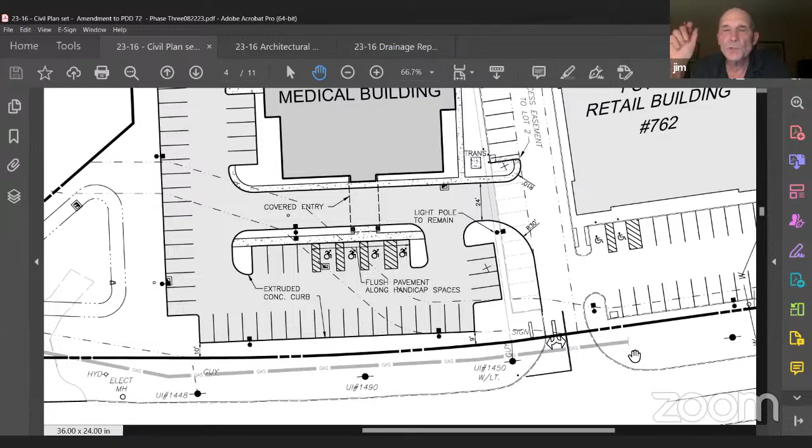It wouldn't surprise me if we have to go back to the state to get this through. It wouldn't surprise me at all that the state's going to require something like that, because otherwise, from the state's point of view, the bottom line would be, well, we'll leave it the way it is and put a new entryway for the new development. And that doesn't make sense.

I like your choice, I just want to make sure we have an entry and exit that will function properly under all circumstances. There are times when River Road traffic is very heavy, and the ability to make a left turn coming out of the driveway might be difficult. At least if you've got the 2 lanes exiting, you can always have the right turn movements. Right. Yep, I agree.

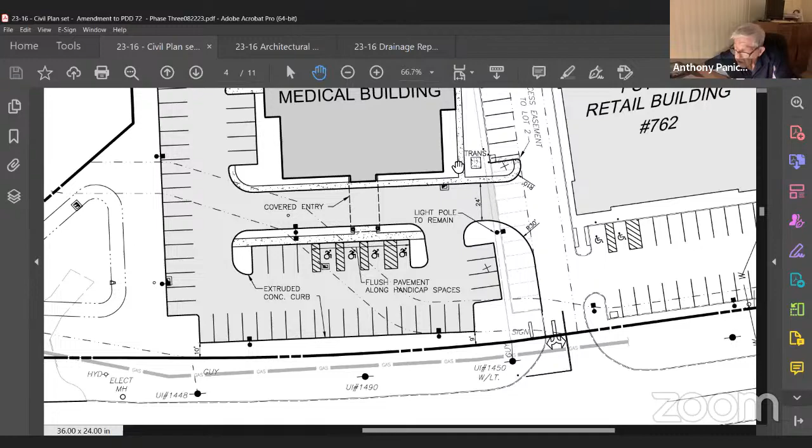Let's see, I think the only other concerns I had were relative detailed stuff you already began to address, Jim. The guardrail concerns weren't shown. I was beginning to wonder if you were going to have them or not, but you've addressed the areas I wasn't concerned for. The other question I had is whether a single rubbish location will be large enough to support this, or does what you've shown need to be a little bit larger?

That's an operational question, certainly I've got a couple of spaces to spare. This is my standard 10 by 10 with a single gate that I show. I would ask you to modify your standard, however, to make sure the exterior materials are consistent with the building design, and to provide for a walking gate into the area with its own sidewalk connection. Sure, yep.

But other than that, I think we've pretty much touched on everything. The general question is, this is a piece of property in the coastal area. You need to address why you do or do not have to do something about coastal area management.

Well, we do have to submit an application to the Shelton Planning and Zoning Commission. And correct me if I'm wrong, it's the Shelton Planning and Zoning Commission that for certain developments it's mandatory to refer it up to DEEP in Hartford. And as we've learned in the past, there are many times when we do not agree with what Hartford tells us. Right, and it's not their call, it's your call.

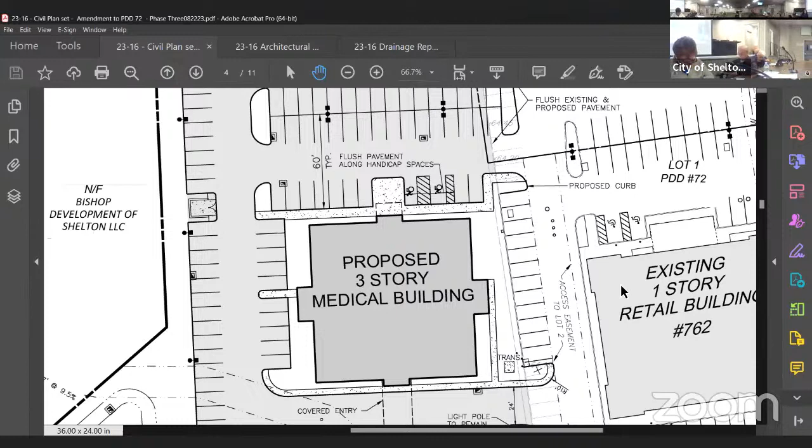Chair, this is Commissioner Laskos. Yes, go right ahead. This is for the architect. Is it a flat roof or is there a pitch to it? It's a flat roof. Would you consider making some sort of hip roof or something? Well, we were just trying to match what's already there. I don't know if we want to deviate from the existing.

So, or all your HVAC control? Oh, everything's up. Equipment up on the roof. Yeah, everything, especially, yeah, everything's hidden. It's all up on a flat roof, so you don't see any mechanical equipment.

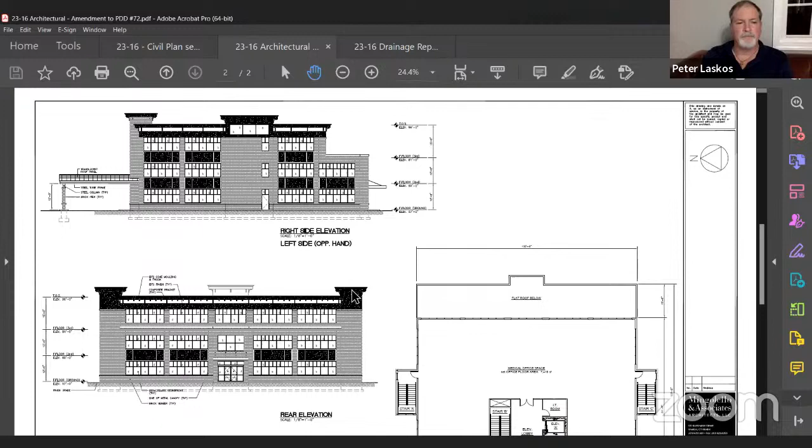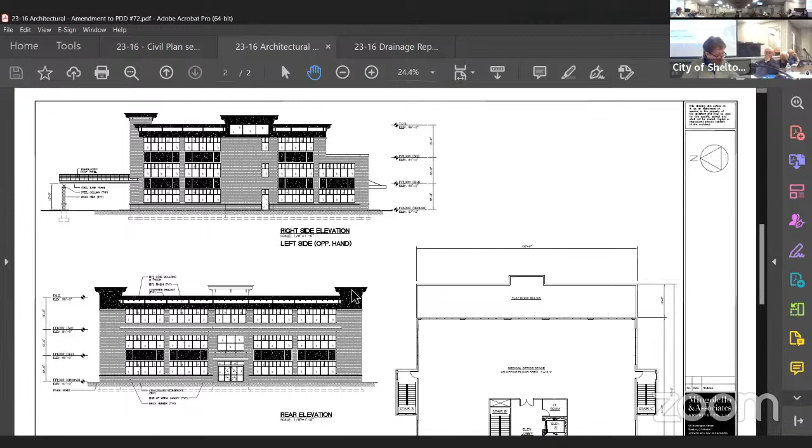Anything else, Commissioner Laskos? That's it. Thank you. Okay, if there are no more questions, if there's anybody in the auditorium that would like to make any comments on this particular application, please step forward at this time. And if there's anyone from the public who is participating remotely, either by Zoom or by phone, and you would like to make comments, please use Zoom's raise your hand feature or dial star 9 on your phone. There is no one here in the auditorium that's stepping forward.

Mr. Rossetti, is there anyone from the public participating remotely? Madam Chairman, Tom Harbinson here. I don't have a raise my hand feature because I'm still as a panelist, but I'd like to speak. Okay. All right. Before you start that, I had intended to ask the applicant about the engineering report that had been filed. Is there anything in particular here that has not already been mentioned when we're talking about stormwater management? Mr. Swift, is there anything?

As I said before, the only difference between the two storm reports, the one for the previous application and for this application, is they were separated in that the hydrographs and the discharges from the surface detention pond for PDD 72 is in the report you have in front of you now. The discharges and things specific to the underground systems in the condominiums is in that report. And then certain aspects of both reports address the actual discharge at the water course. So no, there's nothing in this engineering report that is of any concern.